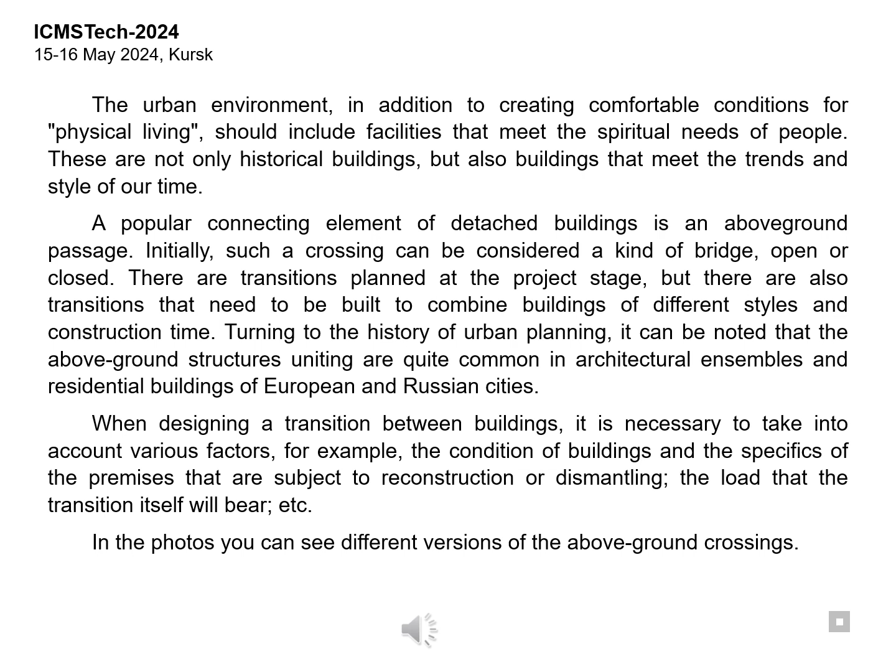Above-ground crossings in Russian regions are usually very different from crossings in metropolitan cities. This is due to several reasons. First of all, this is the uniqueness of the capital's buildings, which must be connected by passages. These buildings are often larger than in the region, and, as a result, have more solid financing.

In addition, the number and quality of contractors in the capitals exceeds the capabilities of builders in the regions. The financial capabilities of regional authorities and private customers are much more modest. Here, rather than prestigious, but utilitarian goals come to the fore.

Nevertheless, there is a desire in the regions to build a transition not only for functional purposes, but also to meet the aesthetic and emotional needs of people. Great attention is also paid to variant design.

For example, 3 crossings built in Soviet times in the Marino Sanatorium of the Rylsky district have maximum glazing for wooden bindings, which creates picturesque views from the transition to the surrounding park.

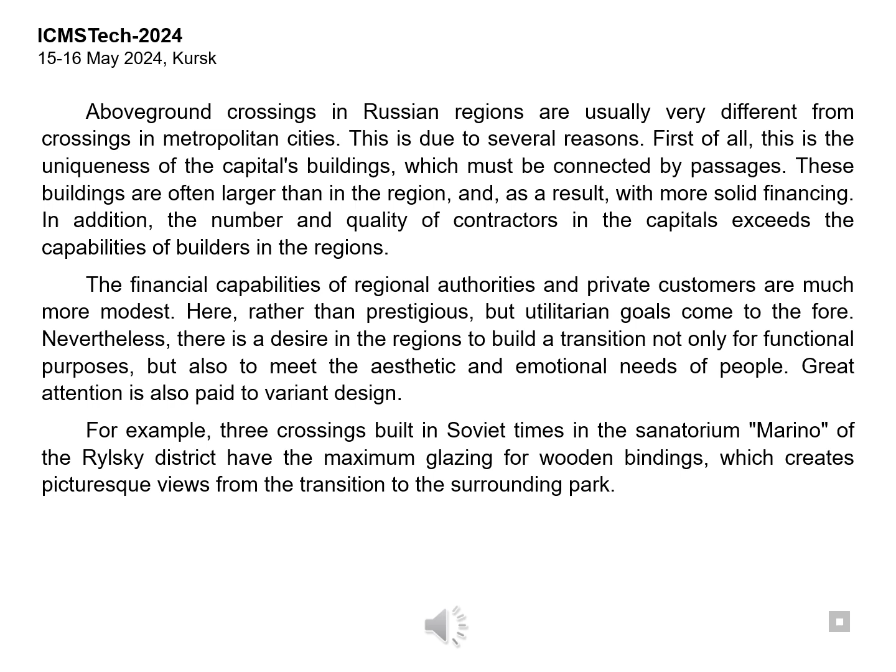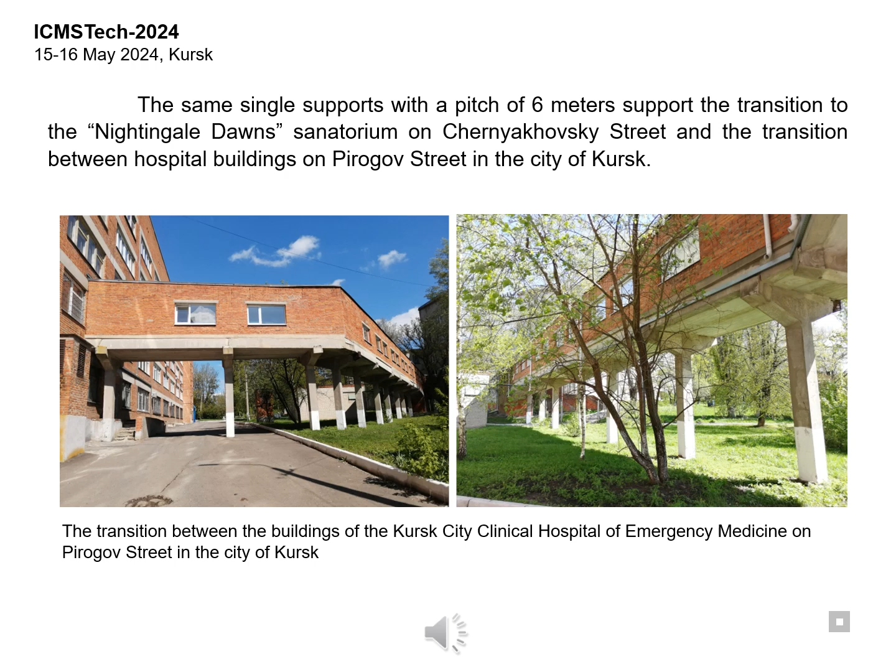The same single supports with a pitch of 6 meters support the transition to the Nightingale Dawns Sanatorium on Chernyakhovsky Street and the transition between hospital buildings on Pirogov Street in the city of Kursk.

The transition between the main academic building and the dormitory of the Kursk State Agrarian University on K. Marx Street is very tactfully integrated into the surrounding development.

The 3-part division of the transition is very organically combined with the architecture of both buildings, one of which is an architectural monument. Despite the massiveness of the supports, the passage not only unites these buildings into one ensemble, but also, thanks to large windows and openings with gates, creates a visual connection between K. Marx Street and the green space of the university campus.

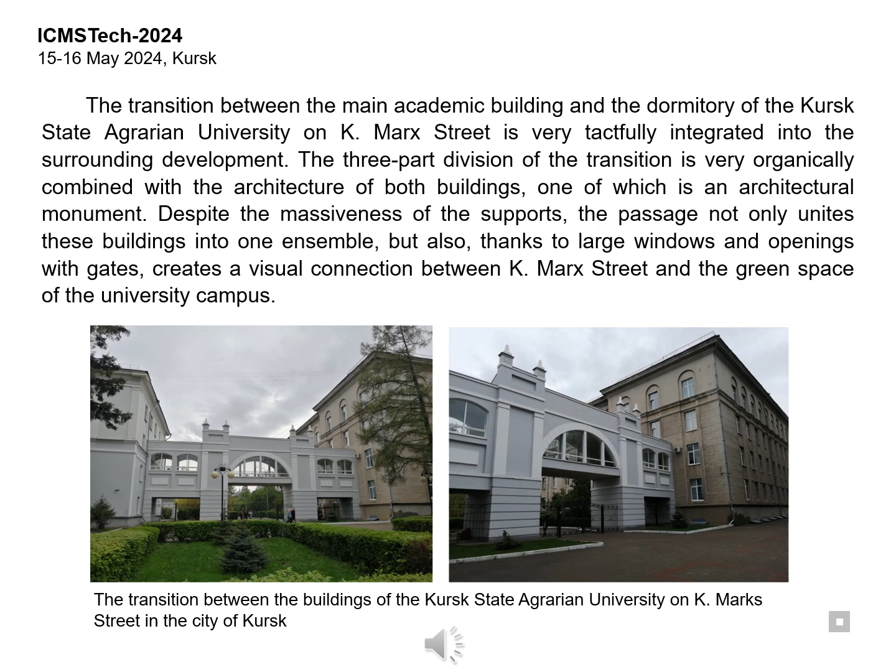One of the first multifunctional buildings in Kursk in the late 1990s was the shopping and entertainment complex of GRINN Corporation, built opposite the central market on Dzerzhinsky Street.

Since traffic in this area is very intense, in 2006 the city authorities decided to build an overpass across Dzerzhinsky Street in the central market area. It was not profitable to build an underground passage due to the large number of underground communications and low relief in the area of the Kur River, which by that time had already been laid in pipes.

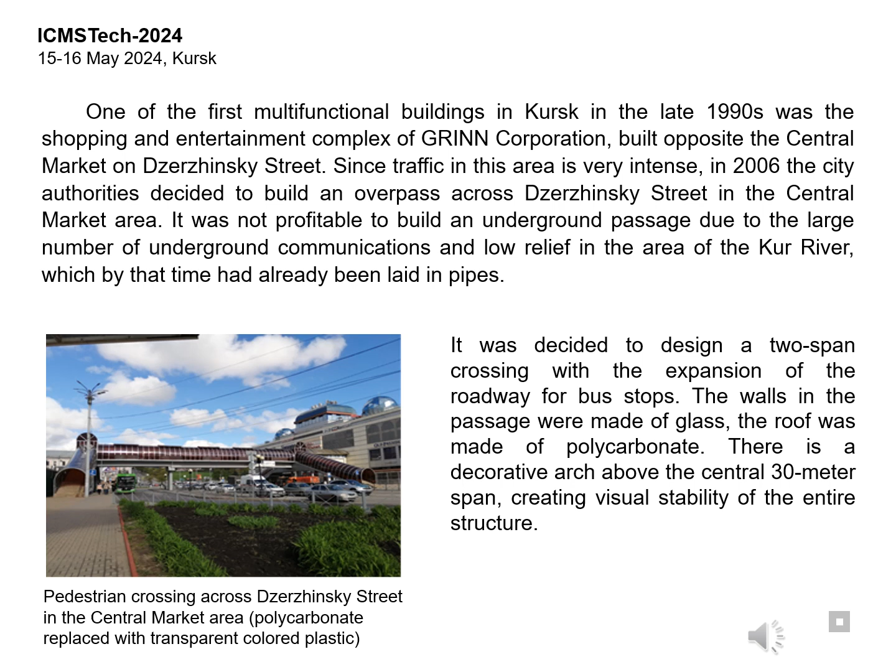It was decided to design a 2-span crossing with the expansion of the roadway for bus stops. The walls in the passage were made of glass, the roof was made of polycarbonate. There is a decorative arch above the central 30-meter span, creating visual stability of the entire structure.

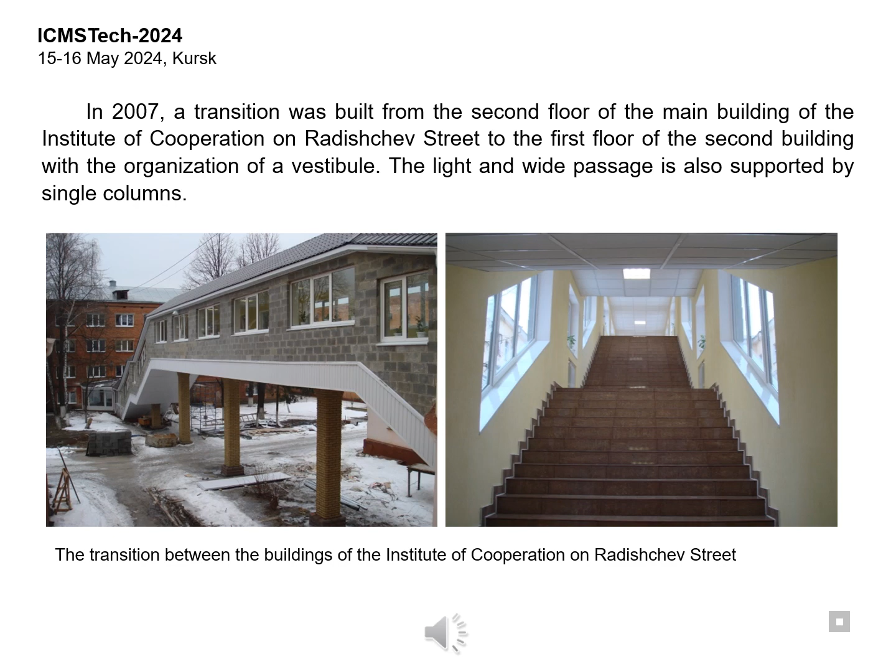In 2007, a transition was built from the second floor of the main building of the Institute of Cooperation on Radishchev Street to the first floor of the second building, with the organization of a vestibule. The light and wide passage is also supported by single columns.

All transitions between buildings were designed to be heated, so the walls were made mainly of brick or expanded clay blocks, with window openings. The exception is the passages of the Marino Sanatorium, where the frame is filled with wooden window blocks. Pedestrian crossings across streets are usually built unheated and in lighter enclosing structures.

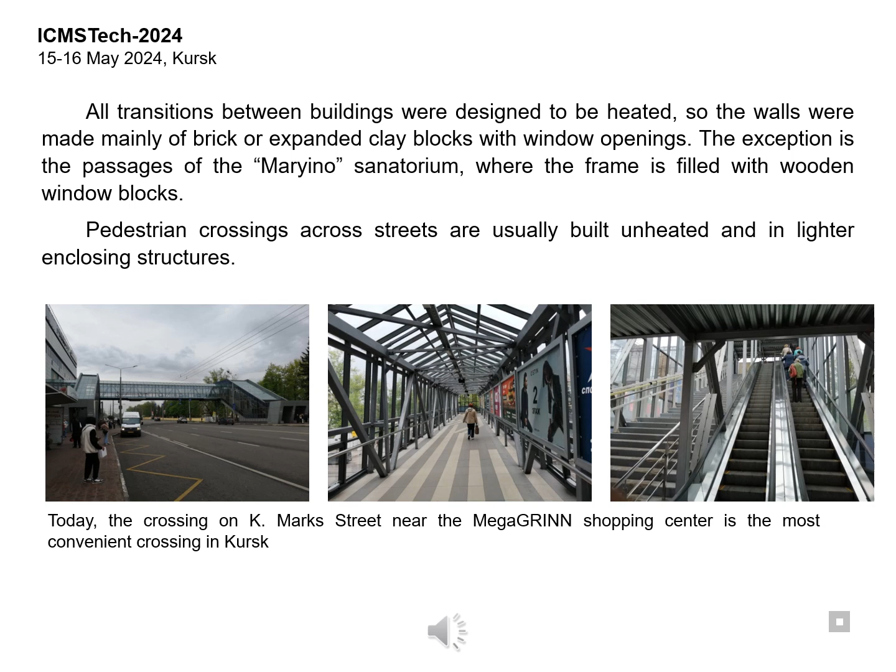In recent years, many crossings of busy highways and railways have appeared in the Kursk region. These crossings are usually cold; their design solutions are different, rather economical, but equipping them with escalators for small flows of people is impractical.

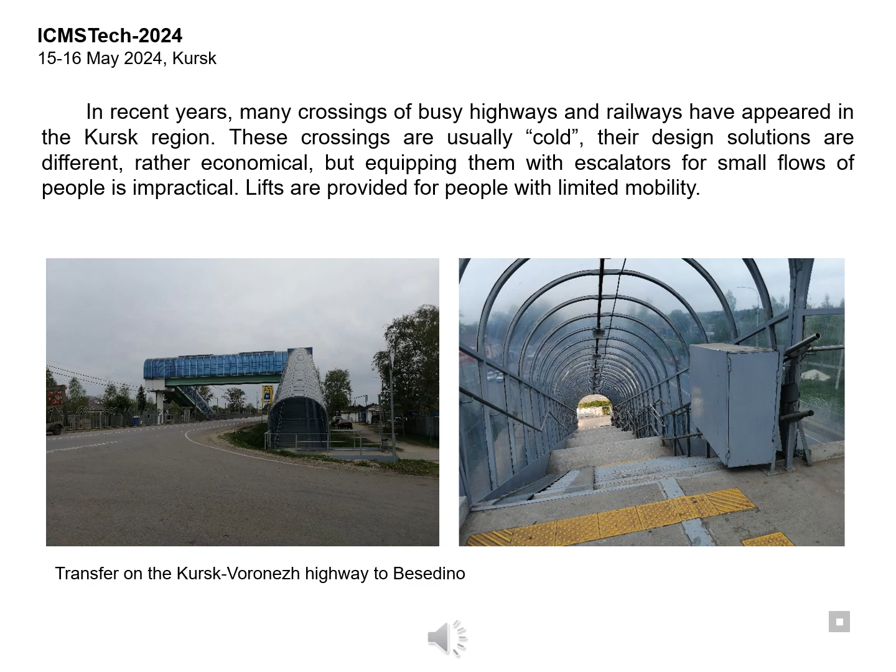Lifts are provided for people with limited mobility. The above-ground crossing can become a striking element that will bring a modern stylistic orientation to regional architecture.

This applies to ancient cities with more than 1,000 years of history, such as Kursk, where buildings of various styles coexist, literally wall to wall, from the 17th century to high-tech.

Kursk State University includes a number of detached academic buildings facing Radishchev Street with their facades.

The main building of KSU is based on the building of the former Mariinsky Girls' Gymnasium, built in 1901 to 1903. The author of the eclectic building project and the head of construction was civil engineer A. Baumiller. For the construction of the gymnasium, the architect of the project was promoted to the rank of a full state councillor.

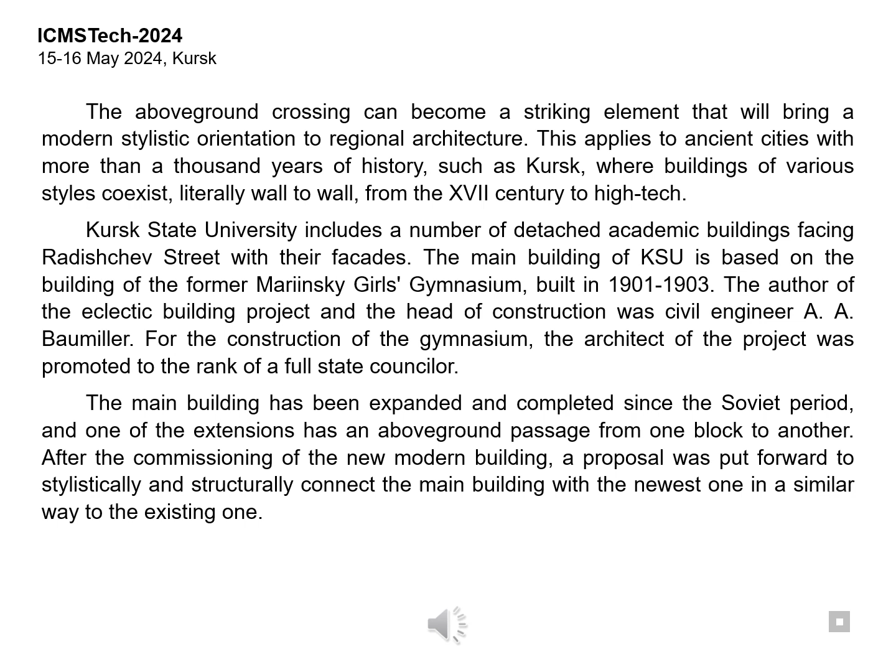The main building has been expanded and completed since the Soviet period, and one of the extensions has an above-ground passage from one block to another. After the commissioning of the new modern building, a proposal was put forward to stylistically and structurally connect the main building with the newest one in a similar way to the existing one.

The architectural appearance of the building includes various elements of classical and Art Nouveau style, quite elegantly intertwined in the aesthetics of the facade. Later, 2 more floors were added.

The university developed, the number of students increased, the opening of new specialties required the construction of additional buildings, which were erected at different times. We had to build unifying elements for the buildings in the form of above-ground crossings.

The original project envisaged a 2-story, 3-span above-ground passage from the new building to the main building of KSU above Kirov Street. The transition was not implemented for several reasons, the main one being the impossibility of laying many underground utility networks under the sidewalks of Kirov Street due to the presence of intermediate supports in the project at the crossing. It was necessary to redesign the above-ground crossing in the new realities.

In the process of research, the development team adopted a number of fundamental design and spatial planning solutions that significantly distinguish the new project from the original one.

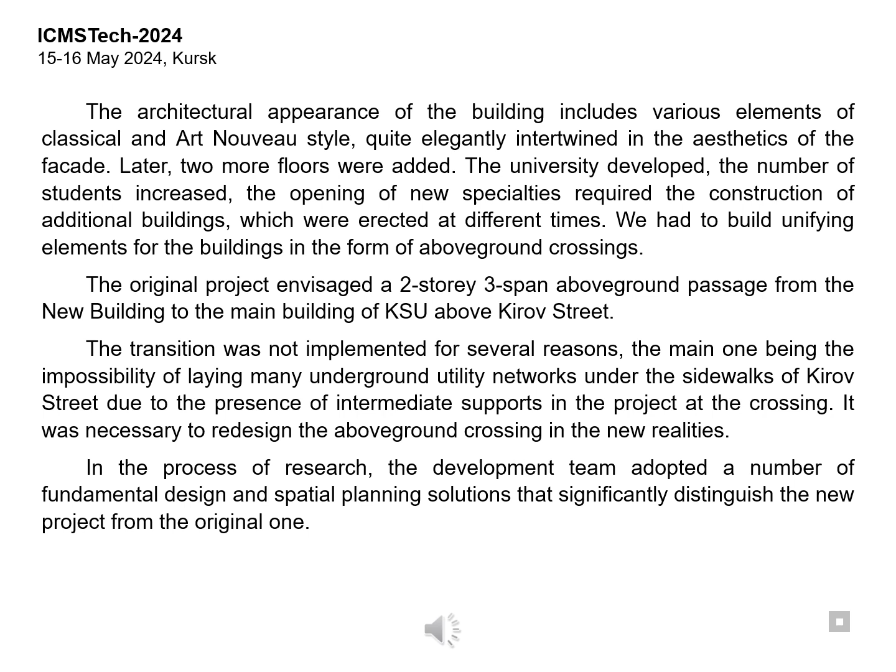Firstly, the replacement of a multi-span beam structure with a single-span one, without intermediate supports. Secondly, the narrowing of the transition to the minimum required width and the cancellation of some educational facilities and recreation areas adjacent to the longitudinal corridors, which allows the redevelopment of the main building with minimal reconstruction. Thirdly, the rejection of a 2-story transition scheme in favor of a single-story one.

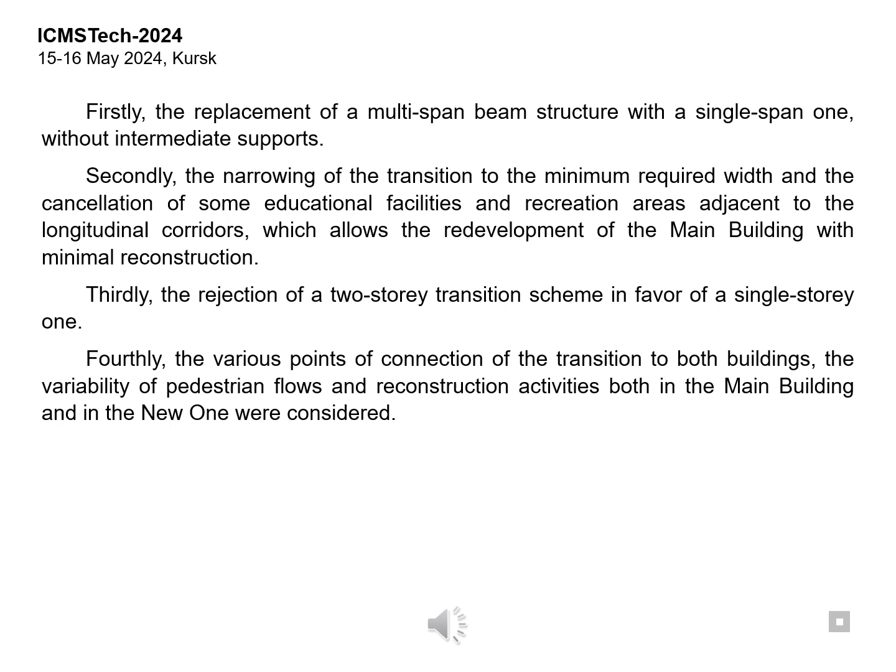Fourthly, the various points of connection of the transition to both buildings, the variability of pedestrian flows and reconstruction activities both in the main building and in the new one were considered. Sketchy searches have identified 4 options for space planning solutions.

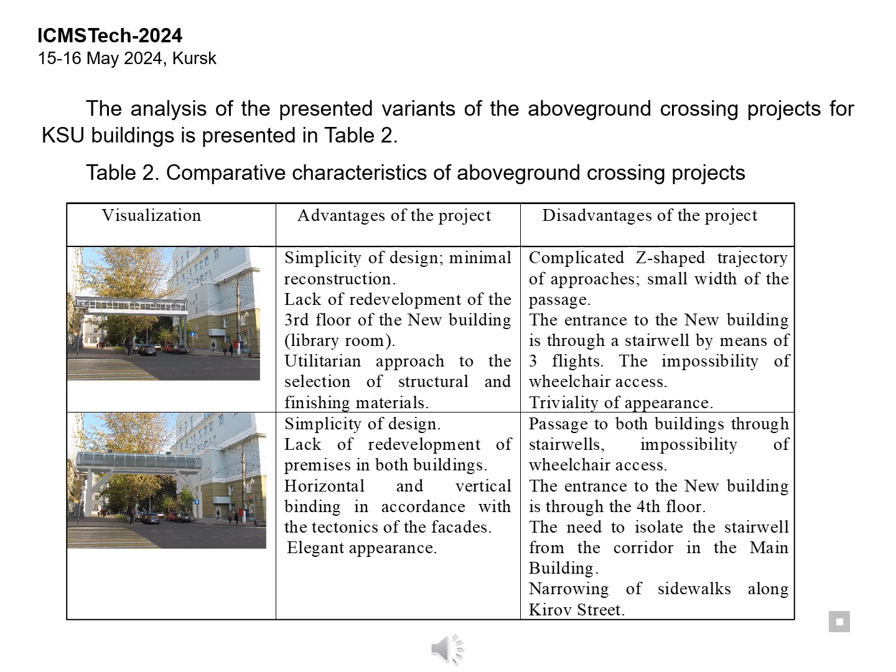The analysis of the presented variants of the above-ground crossing projects for KSU buildings is presented in Table 2. The technical and economic aspects of the project were also reviewed and carefully studied, Table 3.

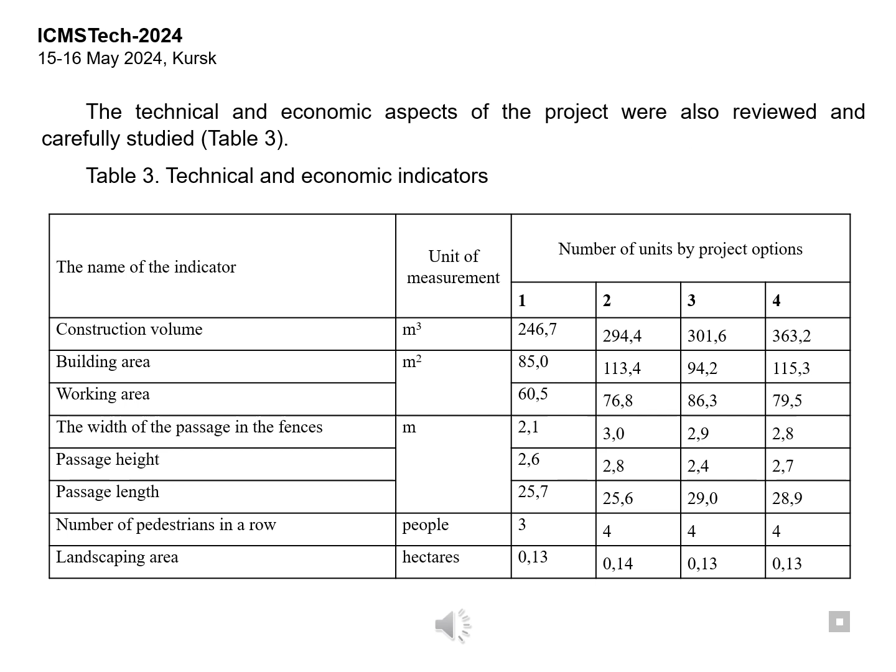Based on the results of discussions, the development team selected project number 1. The main advantage that influenced the choice of the option is the simplicity of the design and technology of construction, the possibility of carrying out construction work without stopping the educational process.

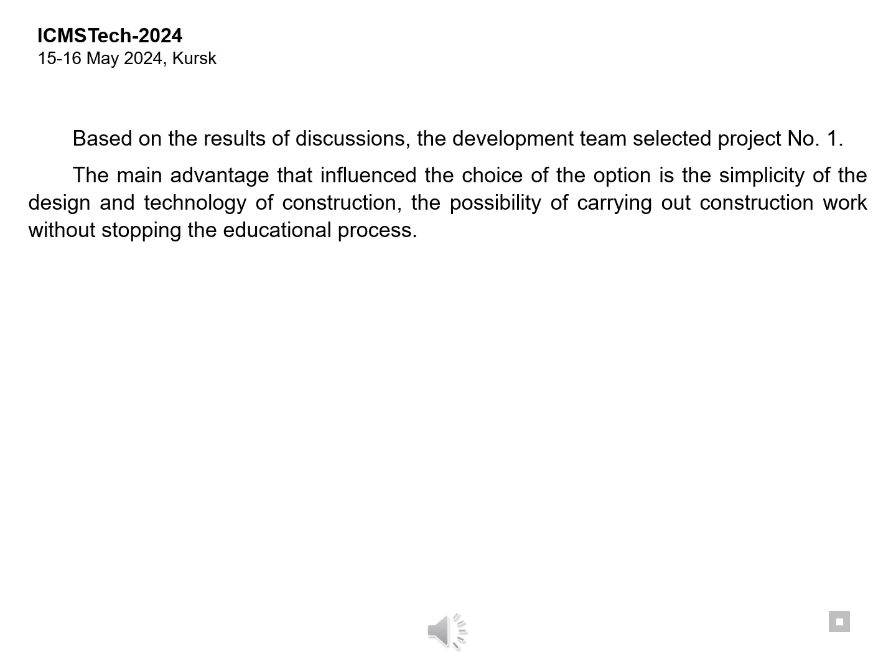Currently, a large number of above-ground crossings have been created in Kursk and the Kursk region, reflecting the main trends in design. Projects of above-ground crossings between buildings are an important architectural element in the concept of creating a comfortable environment for human activity in the region, both from the standpoint of ease of movement and from the point of view of aestheticizing space.

One example is the project of a warm above-ground passage between the buildings of KSU above Kirov Street in Kursk, considered in more detail.